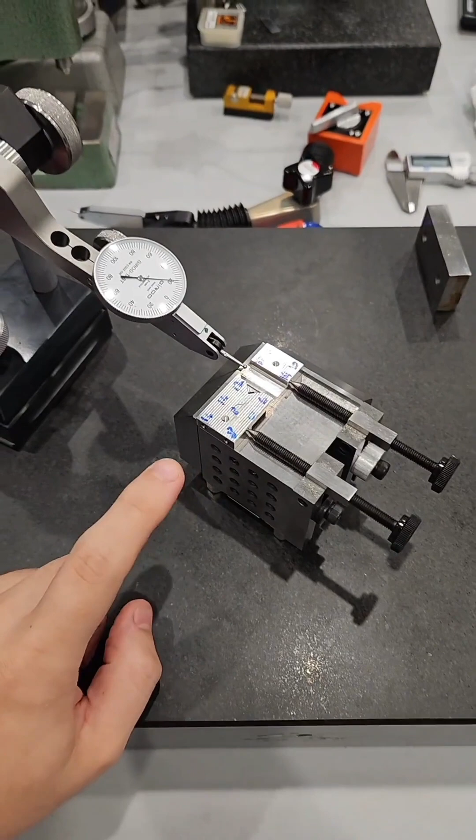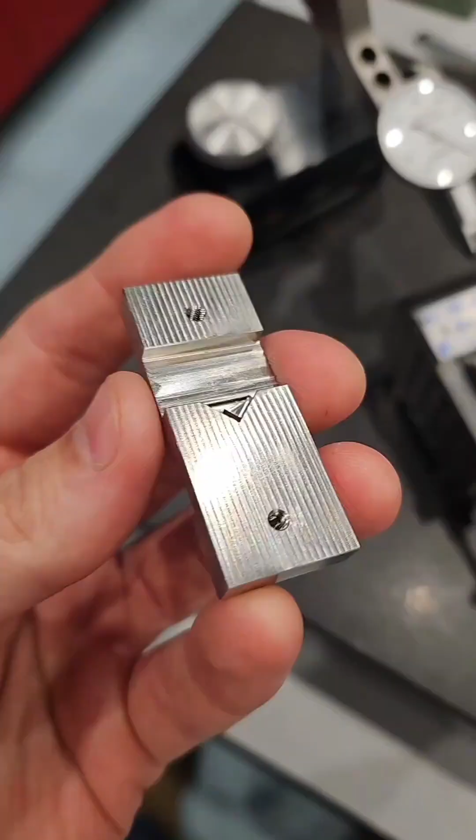Hey guys, Josh here. I'm here on a Sunday working on a little project, but thought it'd be a good time to show you a sweet demo of what the Demuths toolmaker's cube is really good at. So in the next couple of stories, I'll walk you through this workflow and what we can achieve with the toolmaker's cube.

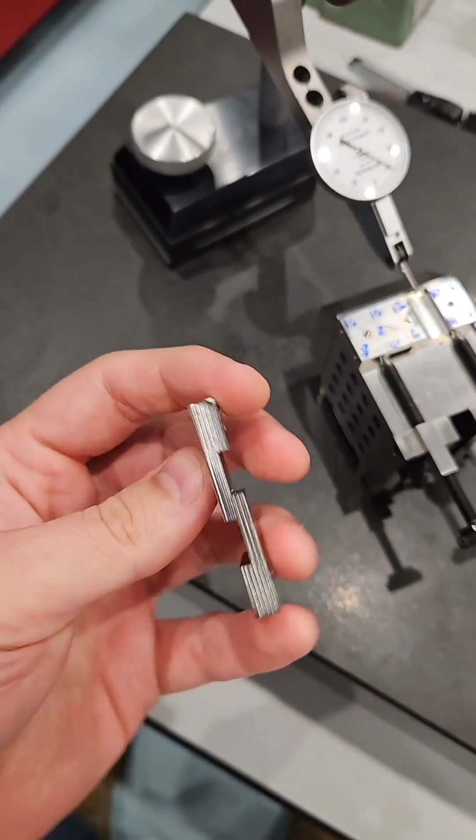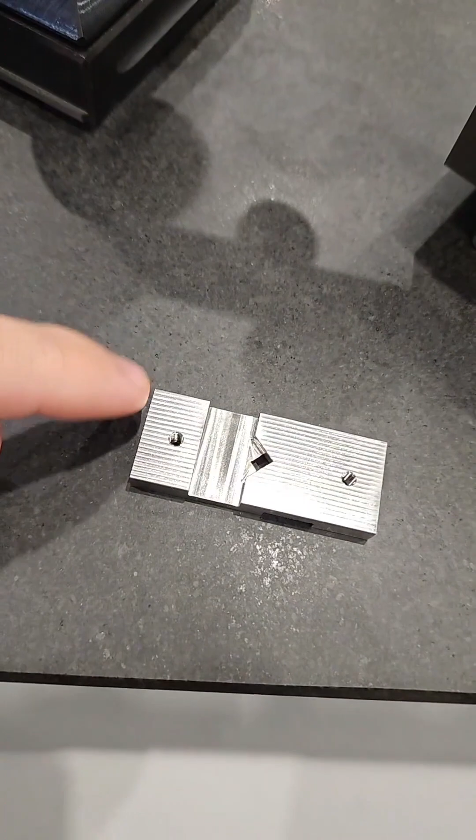So just some context, I've posted about this a little. This is a part that's made from 316. So it's non-magnetic, and it needs some precision integrated into it. Off the mill, what happens is that this sort of warps and twists. All the internal stresses have an avenue to twist everything out. So we just do a quick lapping step by hand to get one plane reasonably flat, so it's not just riding on 2 points. Then what we do is we map out the error, the parallelism error, and that's what we see here. So these are numbers in microns.

You can see it's actually quite twisted. Our 0 is here. We've got 16 microns out here. It actually gets a bit worse. It's probably close to 20 microns here. So what we're going to do is we're going to grind one side, get it reasonably flat, flip it over, grind the other side parallel, get it reasonably flat, flip it over again, and do this maybe 2 or 3 times until we get less than, we shot for around 2 microns total parallelism on both faces.

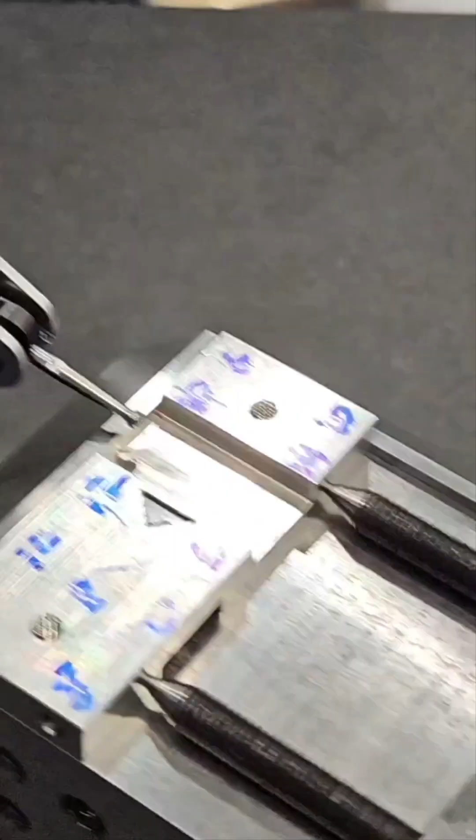The only problem is that with this sort of construction, even if you bend it, like twist it, something is still stressed, but around 2 microns. So it's flip, flip, flip, flip. But because it's not magnetic, it's very challenging to hold. So what we've got here is the Demuths cube setup. Adam's going to love me saying this 1,000 times.

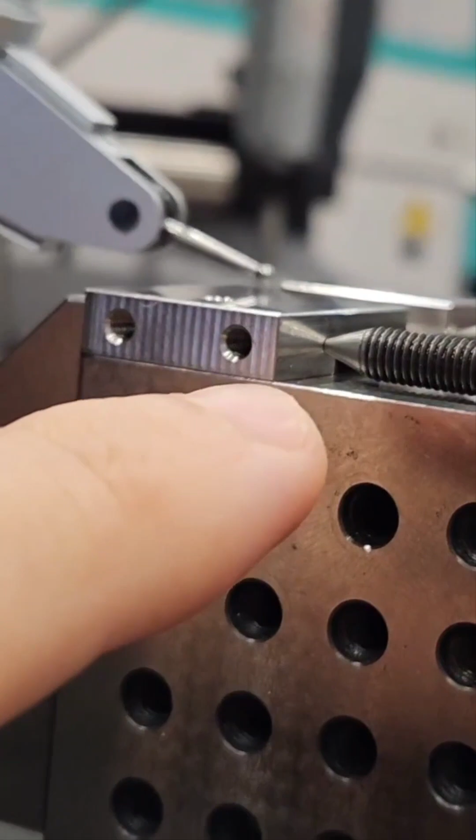We've got a back fence here that's adjustable, and you can see we're riding pretty close to the part height, which is important. And then we've got just a lip here, so it's going to slot in against this way. This is less critical, but we're just nipping it. We're not really wrenching down on it. And then as I said, we're pinning it from this side, and we've got these adjustable clamps that hold with a threaded rod that's just pinning it against this back fence, and you can see it's very close to point contact.

So a couple of things I want to point out. The first is the forces. What forces do we have acting? From the mill, this side here and this flat plane, they're pretty square, but nothing's ever perfect. So if we apply too much force, what can happen is this can all tilt and warp. So these forces, they're best when they're aligned as perpendicular as possible to the fence. So if we're pointing down and up, we can influence this in a different direction. Sometimes that's good. Sometimes you'd want to influence it to actually grind it in better. But in this case, we don't want to do that.

So you can see how we've got these set up. I guess the axis of the force is coplanar to this surface. And so now that we've got the forces sort of analyzed, and just to repeat, if we're pointing this way or that way, we're going to definitely influence how this part is sitting on this surface. So what we've got here is the part, it's not clamped down, but it's basically wrung. It's not really wrung, but it's very, very tight against this surface here because it's been lapped. It's not lapped perfectly, mind you, but it's riding on a plane rather than just a couple of points.

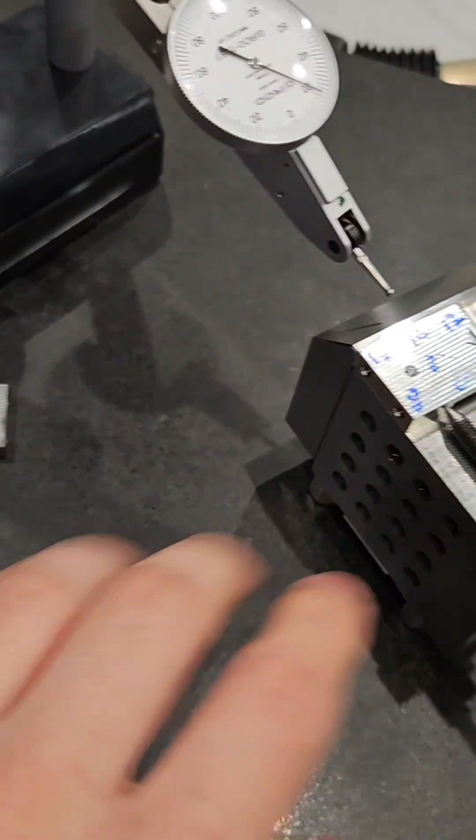And what I've done is I've measured out the deviation on the granite. So without any of the fixture or any clamping forces, we have a map of the parallelism. So now as we tighten these threaded rods to pin it up against this back fence, we can see if we still have that same map. If we've influenced another twist or if we've kicked the part over, we can check that. So here in this demo, this is one side, they're both loose, and we're going to slowly tighten this up and see what happens with the indicator.

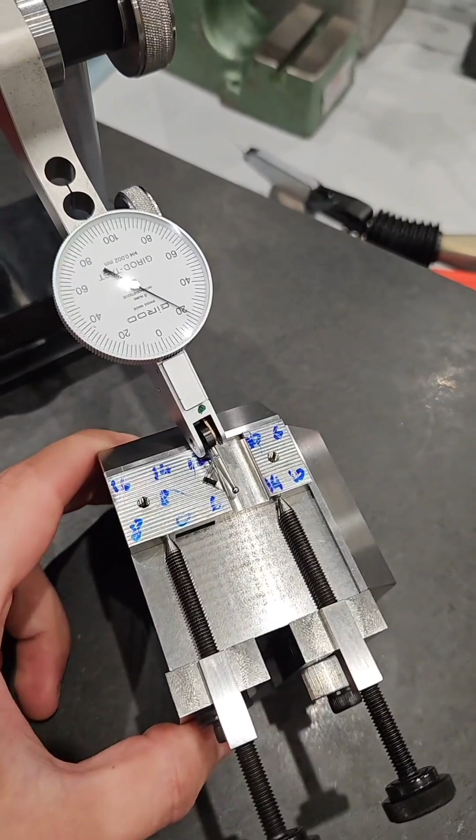So this is tight, like this is probably way too tight now, and you can see it just start to bend up, and that's what we want to avoid. We want to avoid influencing the part too much. We're just pinning this against it, and it's going to sit on the surface grinder as we grind away that top surface, so we don't really need too much force holding it down. That's more than enough. And so if we come over to this side, you can see we're about 14, which is good. We're just going to pin this down too.

So another comment on the forces. Our contact point is roughly in the center of this part. If the threaded rod is still parallel to this plane but is acting below or above the part, we can still influence the twist. So despite us getting this right, we can still be hitting the wrong spot. So you can see we're quite central. And that's pretty important as well.

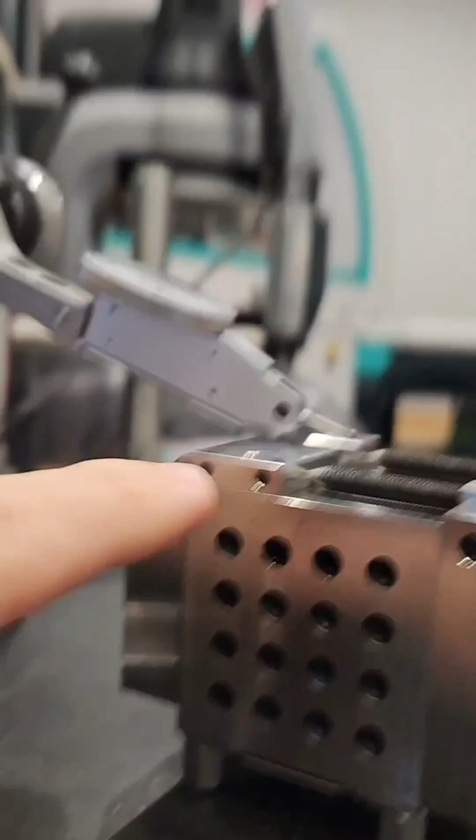We've noticed that, or at least I've noticed that if you're not roughly in the center, you're going to kick this part in a way you don't want. So okay, so we're pinned down more than enough. Probably too much. After this is finished recording, I'm gonna stop it.

So we got 0 here. We got about 8 there. This is going to go up to 16, 14-ish, and 12. And so you can see we haven't really influenced how this part is sitting. It's really good. And now when we grind this in, the hope is that everything stays good, stays okay.

And when we flip it around, we can do the same process, map the error out. And that's how we get this 300 series steel pretty parallel. Hope you enjoyed this. I'll probably keep posting a few more tidbits.

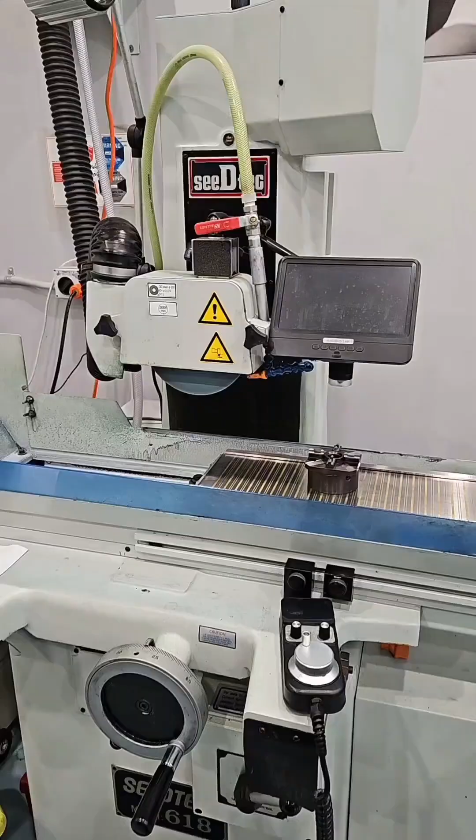And yeah, so we're over here at the grinder. We've got our cube with our spigot installed. This is on an EROWA interface. You could easily have this just as a flat plane and mount directly on the magnet, but we've got this on the EROWA so we can take it to the mill if we needed to. And then we just put it on there, and now we can start to grind all this in.

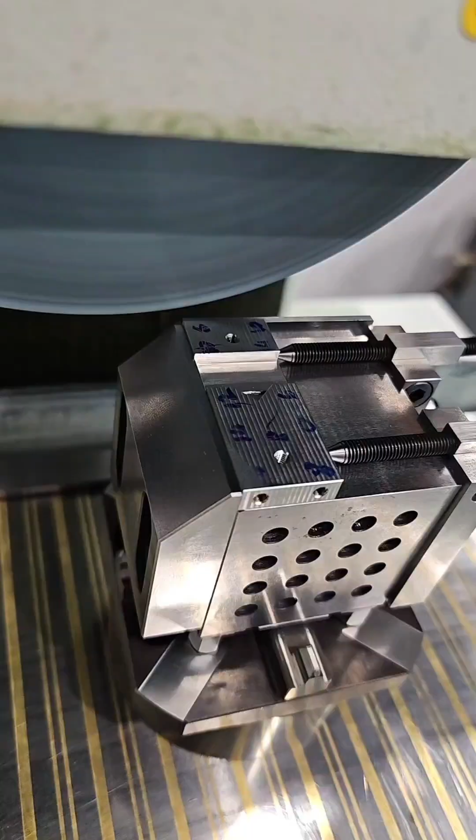So you can just see we've touched off from that corner that's high, and we're going to go very slowly, 1 micron at a time, just down to our 0. To be completely honest, we might not even clean up there totally because we still have to flip a few times. But yeah, everything's tracking so far.

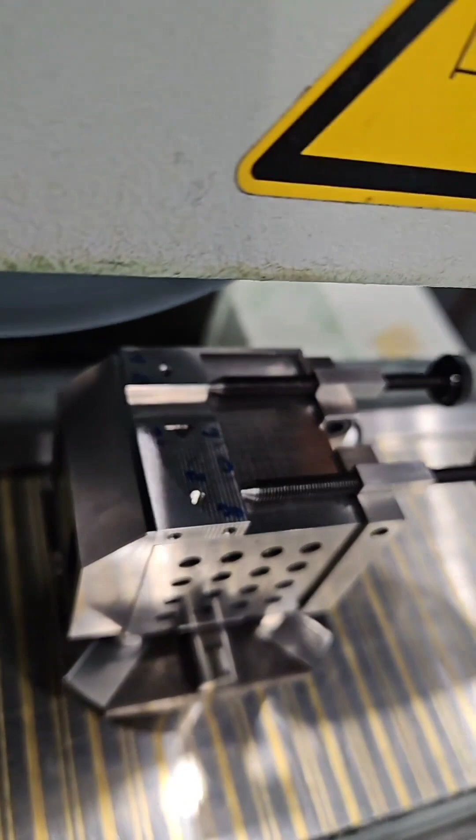It's always fascinating to see how the warp sort of changes between part to part. There's some consistency, but the material stress is not that homogeneous. You can see that contact patch growing. So we've just cleaned up. I think we took about 25 microns off.

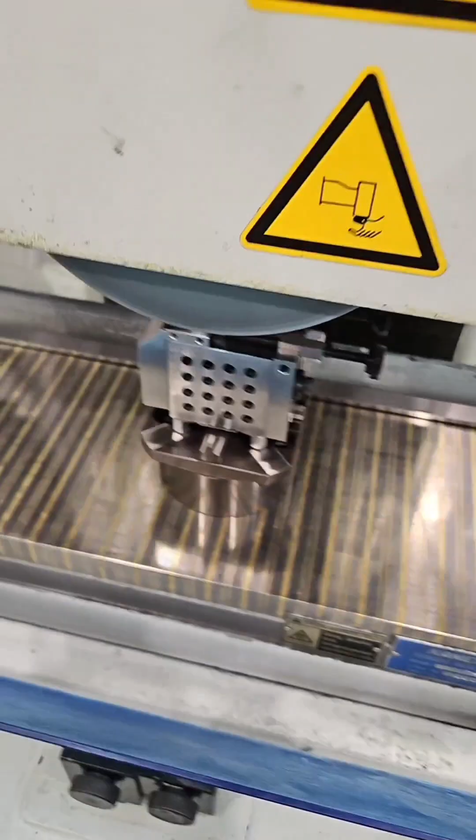And yeah, just a few more spring passes, and then we'll go back to the surface plate to check out how we did. So we're scratching up our nice surface, but it doesn't really matter. And you can see it's not 100% perfect, but it's a lot better than what we had.

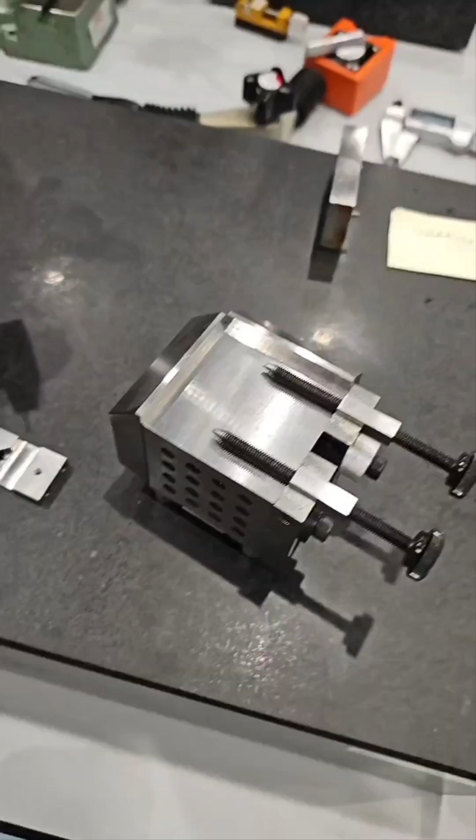So yeah, that's the Demuths Toolmaker's Cube. Very, very handy piece of kit. Incredibly well made. Adam is a wizard when it comes to these sorts of things, and tell you what, definitely could not have done many jobs without this thing.

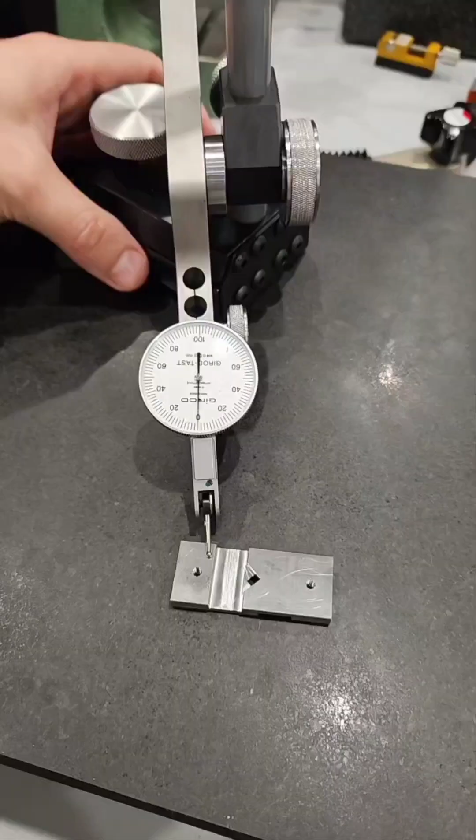So this is after like, I don't know, 4 flips, I think. It's not perfect. Oops, this is challenging to do one-handed. I think we're about 3 microns in total at the worst spot. That's like -2. Go here.

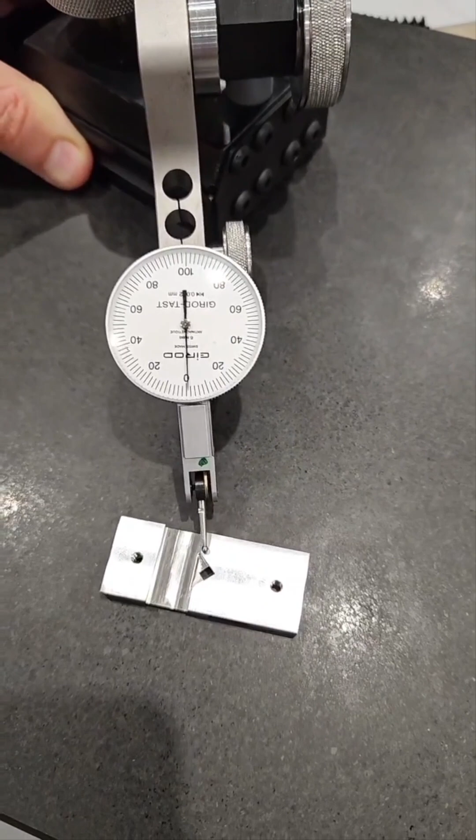So yeah, the spec is 5 microns, so in the spec, and there's some other operations that still need to be done, which might bow it out a little bit, so I might have to go back and flip it again, but I'm pretty much there. Woo!

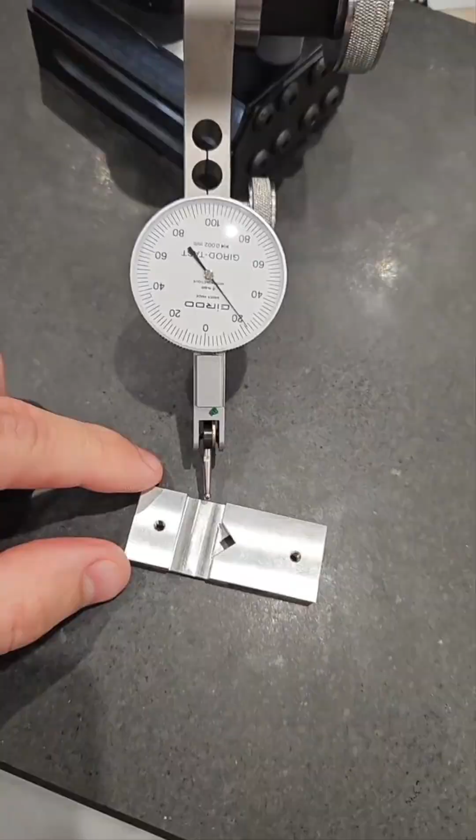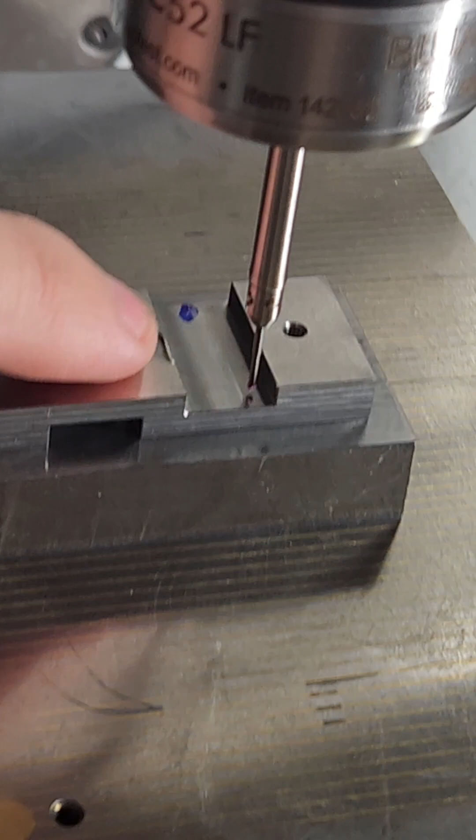We're going to flip it over and then mill this other pocket to size and sneak up on the distance between these 2 pockets, pocket 1 and pocket 2. So that distance is really, really important. And on the HT, this is actually really good. You could easily do this on the grinder and get a wheel that's gonna fit in there and just like swipe it in one pass.

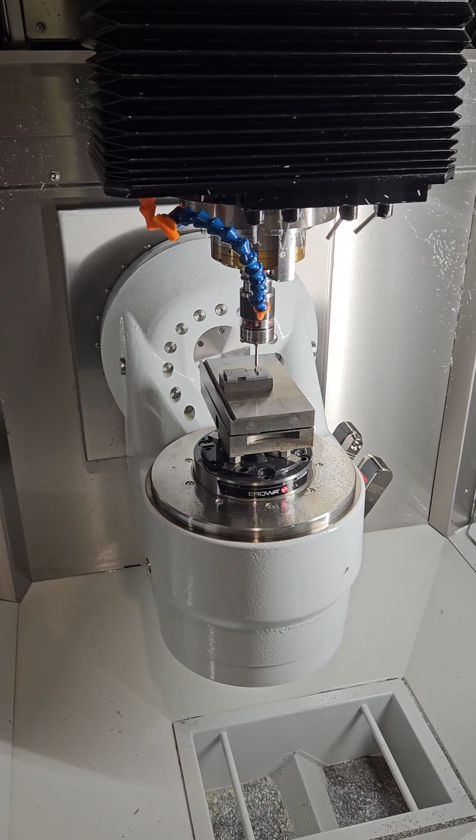It's probably what I should be doing, but I'm not that confident on the grinder, especially in that Z-axis. We've got a servo motor on the Z-axis with a ball screw, so getting that wheel centered in that slot and not gouging anything is, yeah, a bit of a challenge. So anyway,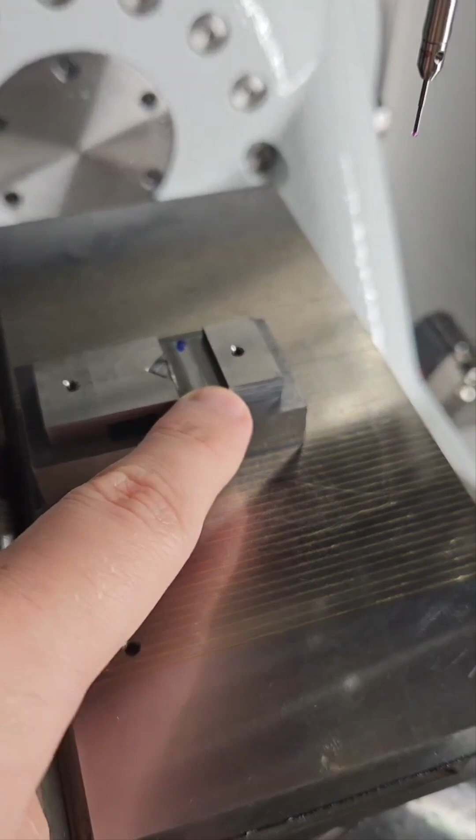that's this next setup. And what's really important is that the probe height and the tool height are really, really good. So you have to set the tool incredibly well. So currently I've probed this for Z. We've got 14 microns of skew that we're going to correct. And then I've just centered it on this slot.

And since I've got the C-axis, I've just probed in this edge. And that'll give me my rotation. So yeah, the next thing is to run, here we go, this toolpath here. Got just some basic facing. Well, it's not really facing, but like pocketing.

Just to size. And then we can measure with the probe a bunch of points to see how well we did. Take this block off, put it on the surface plate, and that'll just verify what we've done. Once we get a good plane, then we can use that as a datum, flip the part over, and then mill the other pocket relative to this one, and be pretty sure that we've got everything right.

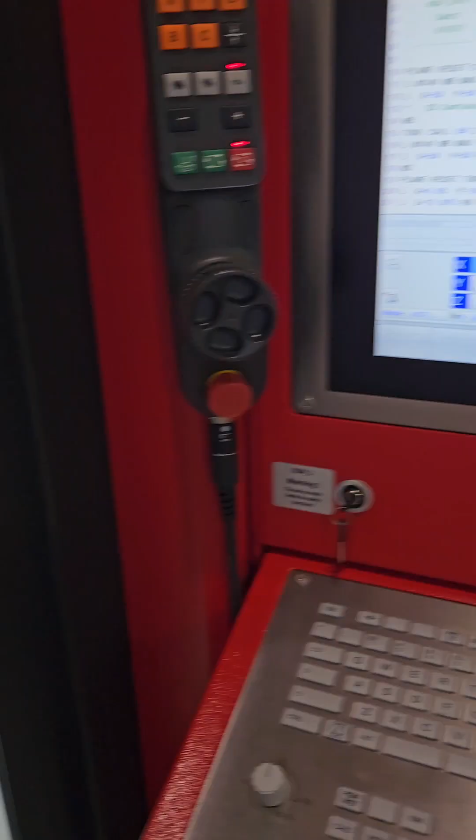So we've got our program loaded, our tool's in there. We've gone through the whole rigmarole of offsetting the tool and getting the length perfect relative to the probe. What I want to show you is something really cool on the HD. So here we have our PLC compensation for the Z height. I've literally just turned the spindle on. Usually when the machine's not running, it's at 0.

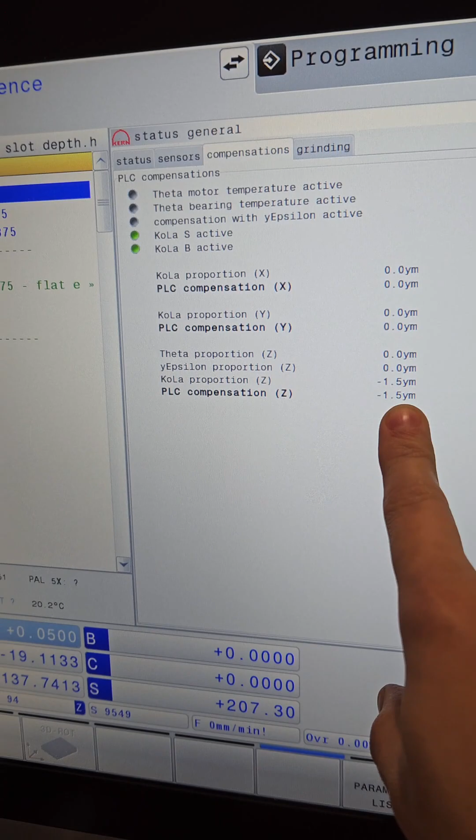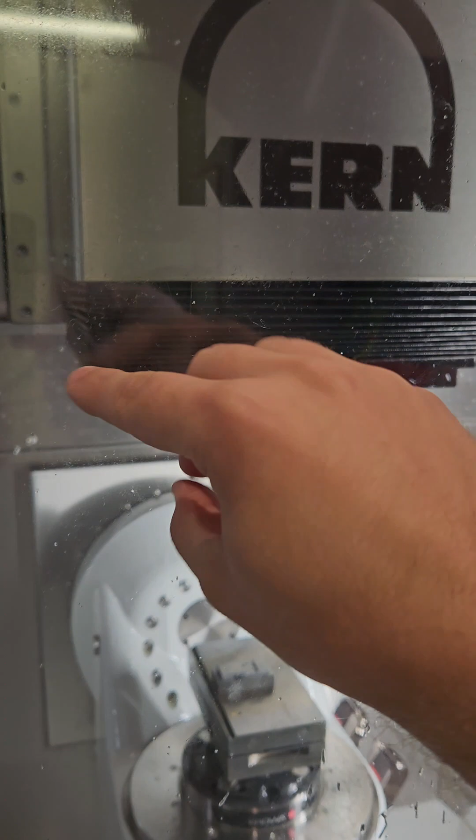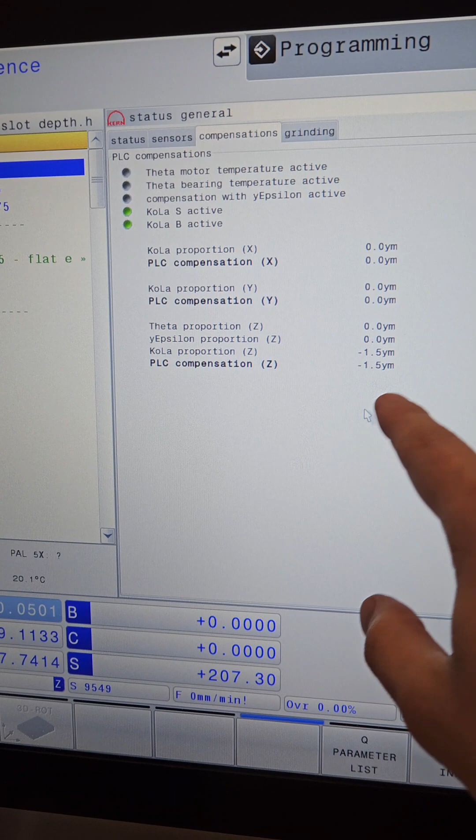But the spindle is just a big heater. That's all it is. And this whole column is actually made from aluminium, the core of it. And as you turn the spindle on, you generate a lot of heat. And even though there's active cooling and all these things, everything expands and the spindle grows, and the machine is intelligent enough that it compensates the Z-axis growth preemptively based on a software model.

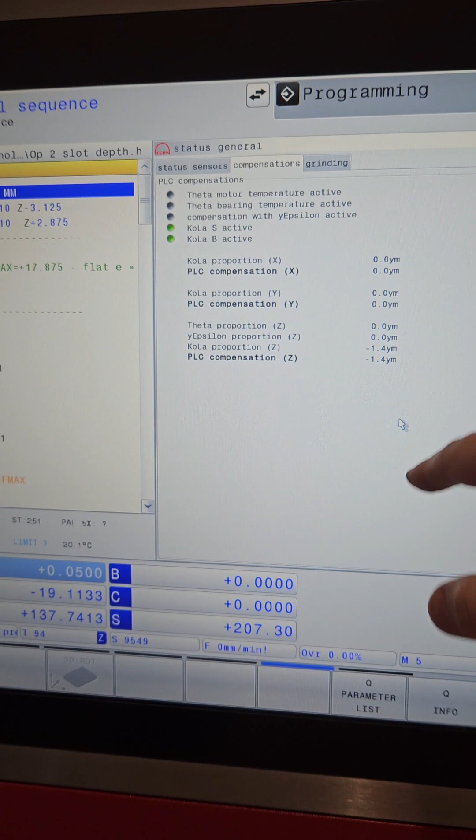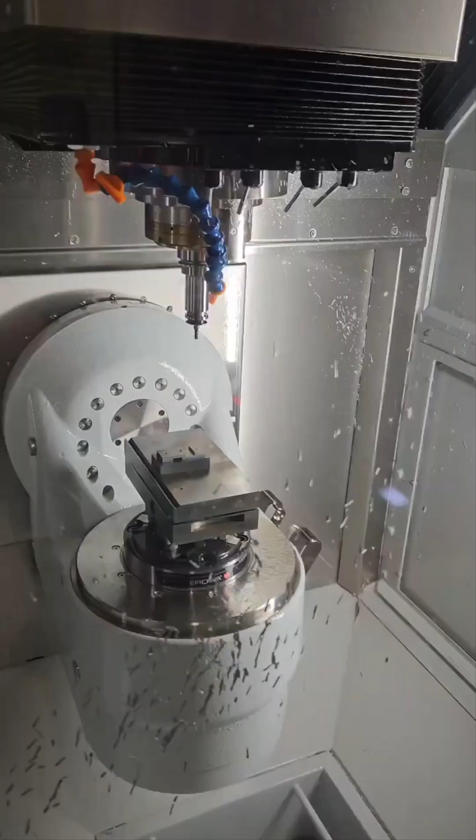So there's a model, a compensation graph, basically like a lot of points that get interpolated between, that compensates the Z-axis growth. So what we're going to see is the real-time compensation of the Z-axis. So we're going to go spindle on, and you're going to see, I'm going to turn it on 3, 2, 1. There we go. So it instantly jumps.

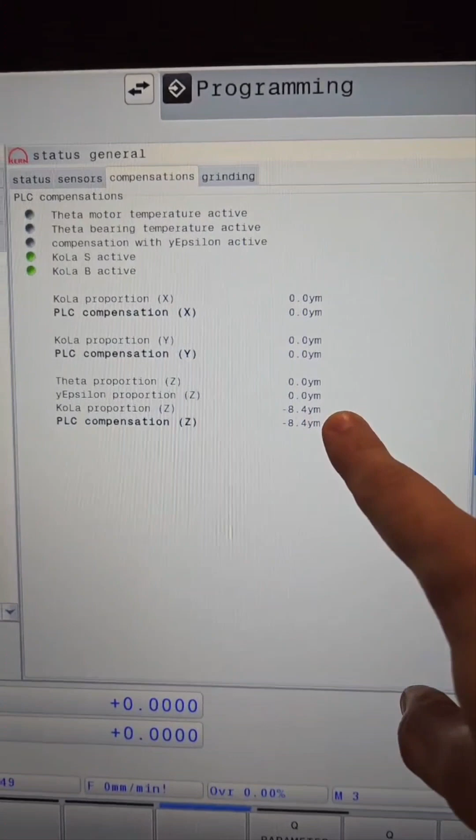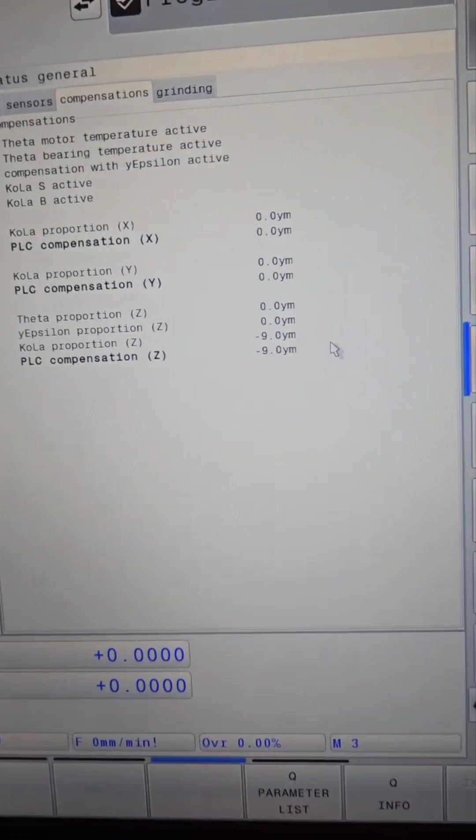Currently we're spinning. Can't really see that. It's about 10K, so very low on the spindle speed, but it's climbing. It'll climb up to, I think maybe 15, 16 microns at around 10,000 RPM. This will peak at 40,000 RPM. I think we've got something like 90 microns, or maybe even 100 microns of growth. So currently the Z-axis is getting pulled up by that amount as the growth is happening.

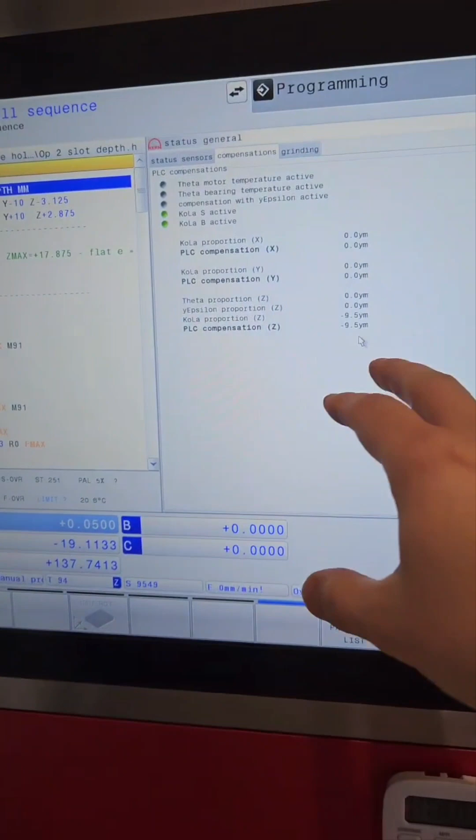So you can see that instant jump. That's what happens when bearings move around. You get this huge jump of energy dumped into the machine, and the temperature just spreads through the Z-axis. So this really helps us sneak up onto those last microns, but we still wait for this to stabilize a little.

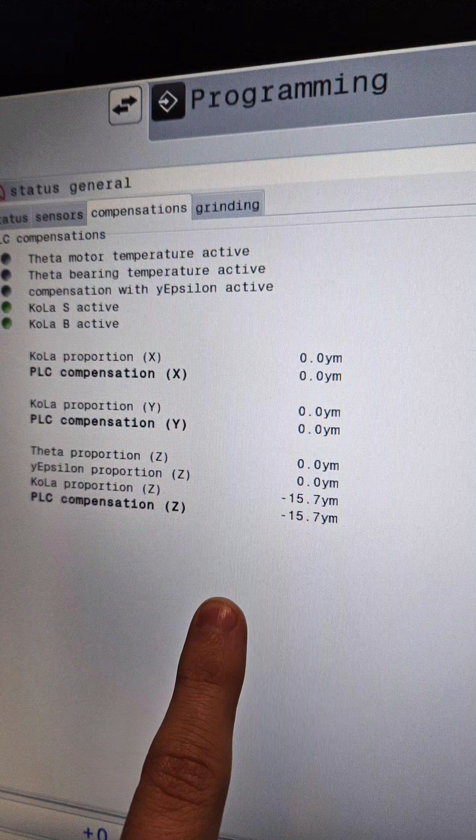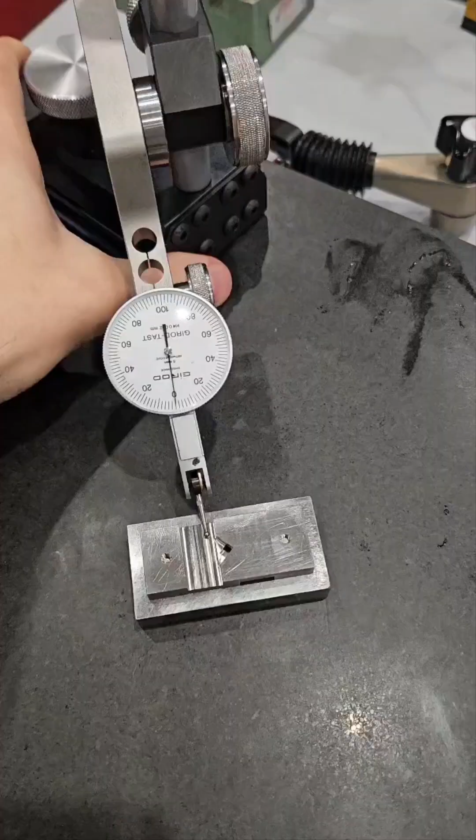We've milled it. Now we're just checking it to see what the probe says. We hit cycle start on probing position for Z minus. Probe comes down, touches off, and we're 0.5 microns, which is pretty good. I'm going to leave it there. I'm not going to touch it too much. And then take it off. We just double check on the surface plate, flip it around, do the other side, and see how close we get. So this is just a check. We're pretty good.

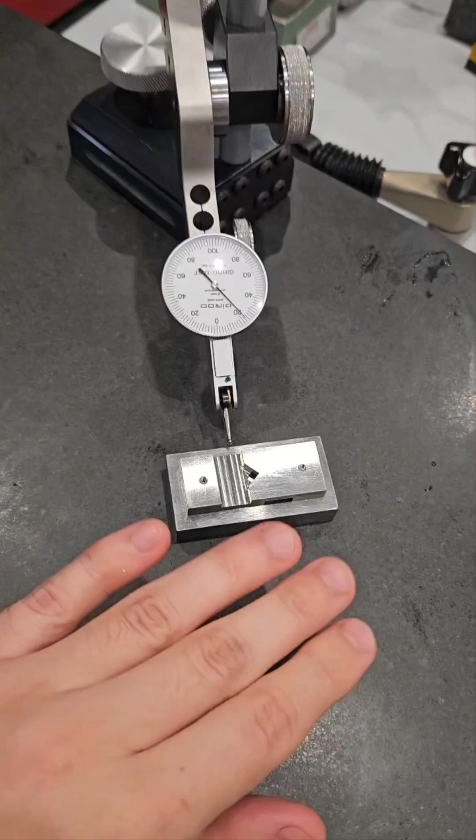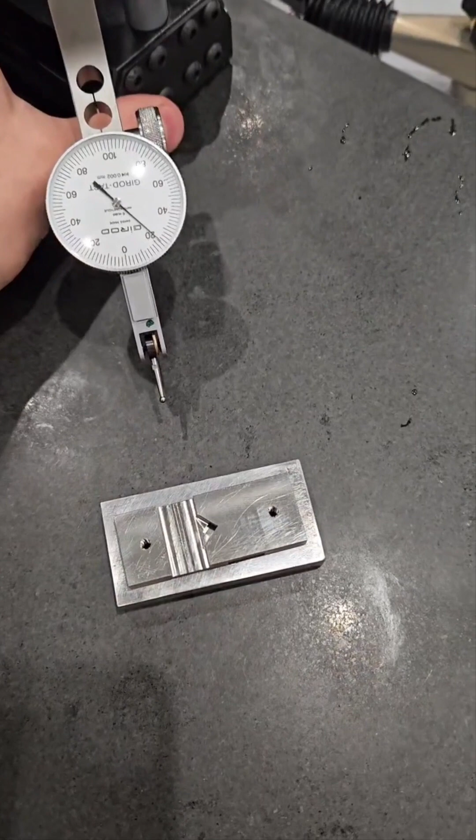Yep, so that means that everything's correlating between the surface plate and the magnet while the part's still on the fixture. So now the true test is going to be us bolting this off and seeing what happens when it's not constrained. Okay, so we've taken off the screws. The part can actually still slide around. It's sucked on a little bit just because of the oil. But what I want to see is what happens when we've released the screws.

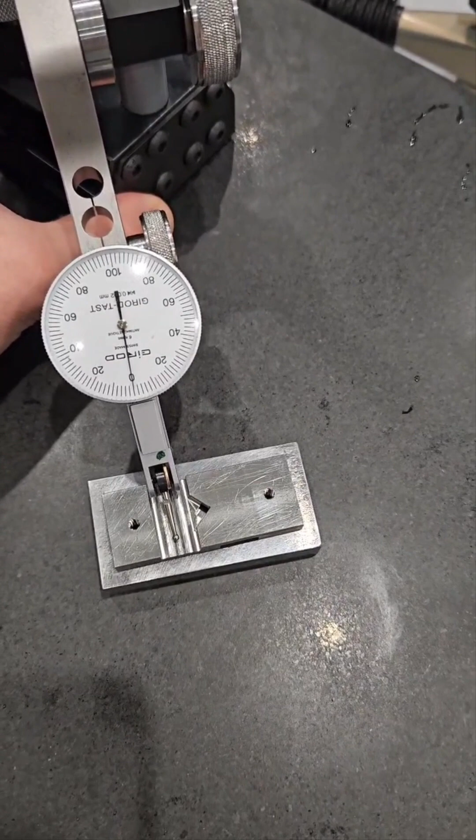I can't undo the screws while it's on the surface plate. So we go here. Pretty good. So that means we're not really influencing it too much with the screws on this little sort of fixture plate, which is good. So now we're just checking that top plane again to see if anything's moved, and we're still pretty okay.

I think we might, we're not better. We're about the same. We're still about 2 microns, which is good. That's actually really positive. Nothing's moved. By us milling here, it's not caused anything to warp or twist. So we can move on now. We can flip this over and do the other pocket over on this side.

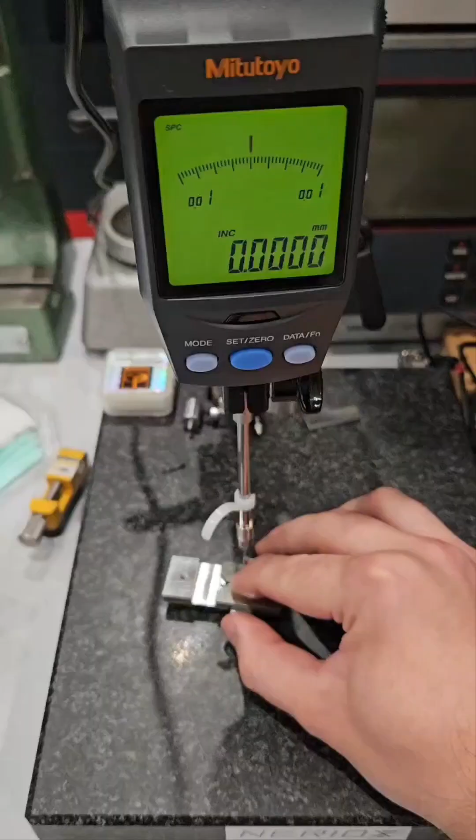So this is our measuring setup. We've got this part riding on a gauge block. It's sort of acting like a little riser. Side note, best investment that you can ever get for your workshop is a cheap economy set of gauge blocks. Really helpful for things like this where you don't actually want to use the good ones.

Anyway, I can't really do this two-handedly, but we just probe this surface where the ruby is now. That's our 0, and then we move over here, and that gives us the distance between the two planes. Obviously, it's going to rock. It doesn't want to, and it's very feel-based, but you can really feel when it's seated, and especially with this indicator, I'd be comfortable within a micron on this sort of setup.

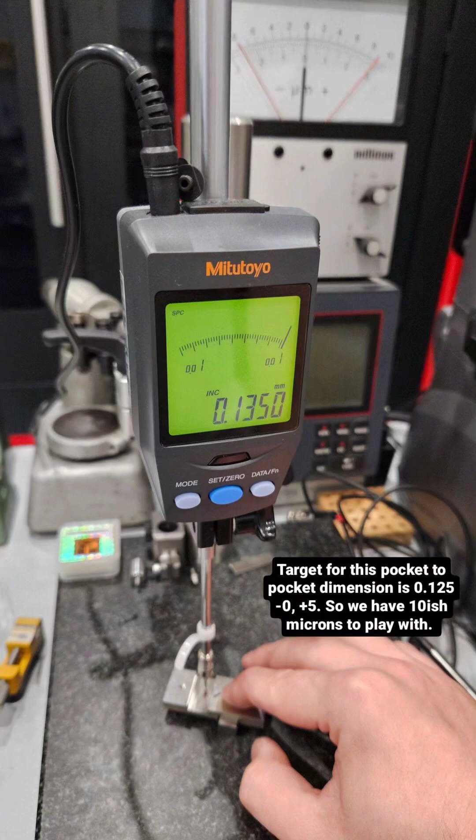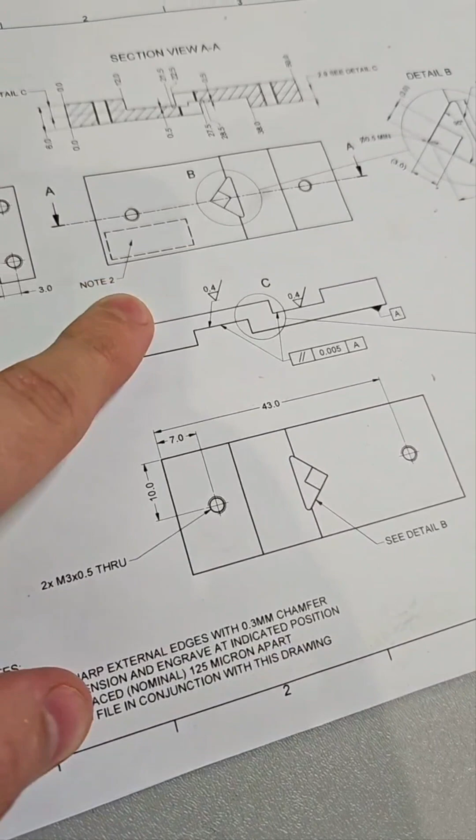So that's it. We've got that dimension, 125 plus 5 minus 0. Yeah, we're on the high side, but what you'll notice on note 2: measure dimension and engrave at indicated position over here. So they don't really mind what the dimension is as long as it's measured and indicated. So they use this for some calibration of something.